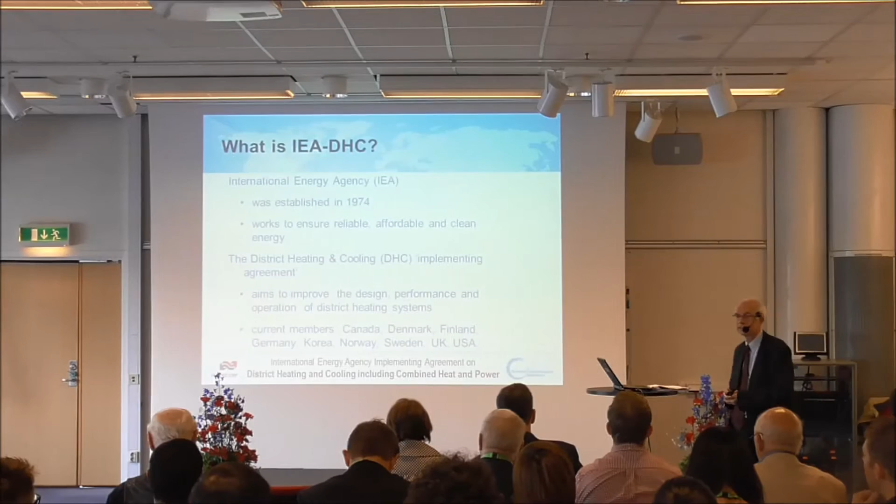First of all, then, what is IEA DHC? IEA stands for International Energy Agency. This was established in 1974 in response to the energy crisis at that time, and works to ensure reliable, affordable and clean energy. As a result, a number of these so-called implementing agreements were set up for energy efficient technologies, of which district heating and cooling is one. This aims to improve the design, performance and operation of district heating schemes, and we have 9 current member countries: Canada, Denmark, Finland, Germany, Korea, Norway, Sweden, UK and USA.

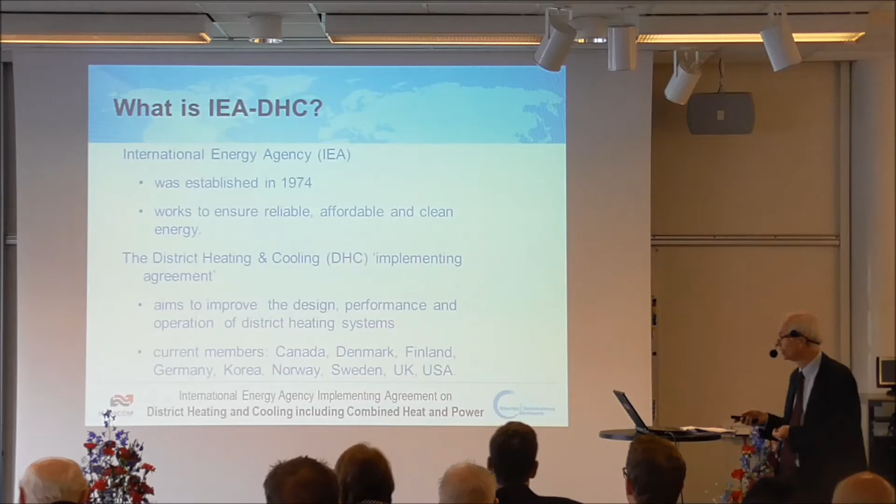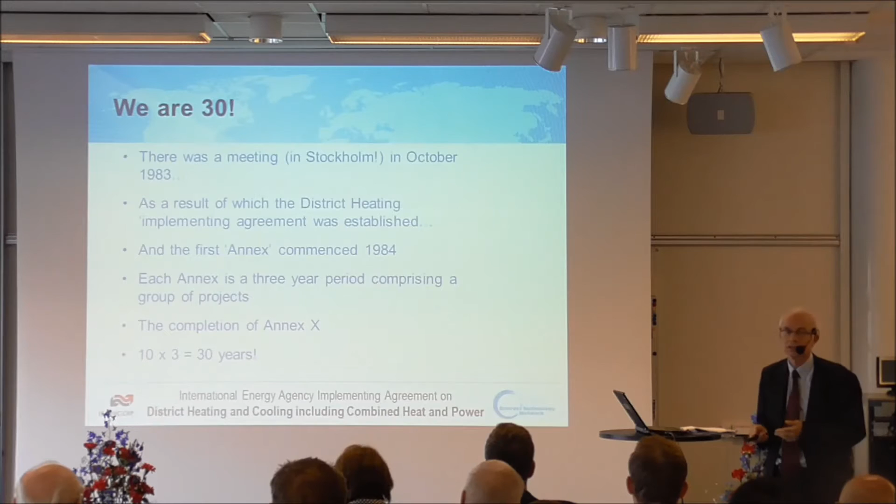This implementing agreement is 30 years old, and a little bit of digging into the history with the assistance of colleagues within our group revealed that there was a meeting in Stockholm in October 1983, as a result of which this implementing agreement was established, and the first so-called Annex appeared and commenced in 1984. Each of these annexes comprises a group of projects lasting 3 years, and we're at the completion of Annex 10. This is the end of Annex seminar for Annex 10. 10 times 3, 30 years.

So the significance of that, I think, is there's an awful lot of material on a lot of topics that's available. I look upon it as a kind of library or growing encyclopedia of district heating projects and research, which you are free to look at on our website.

So what exactly is it that we do? We carry out research projects on all aspects of district heating and cooling technology, focusing on reducing cost, improving performance, so pipe materials, installation techniques, system optimization, proactive maintenance, thermal storage, integration of renewables, to name but a few. There's something like an 80-20 split between technical and policy-focused projects, and the policy bit is primarily because we actually do have an influential voice by operating under the auspices of this International Energy Agency. That is connected into Energy Ministerial and gives us a good policy voice and influence.

I mentioned our website where you can find the research reports. There it is. So if you haven't seen that, please feel free to look. And if you have been there before, there's another reason to keep tabs on it, because shortly we will have these Annex 10 reports that we're going to hear about today. The full reports will be up there soon.

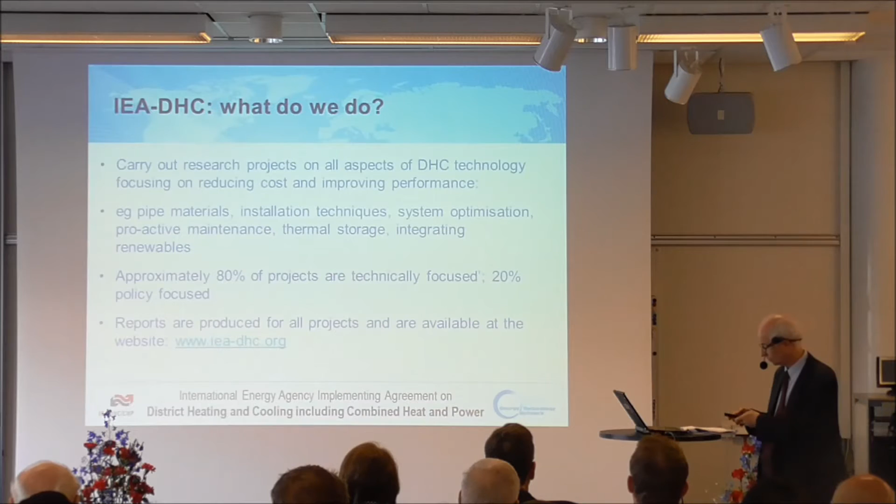I think it's exciting times for district heating. Sadly, I wasn't able to attend the symposium itself, but I heard what an amazing event it was. And I think this is kind of reflected right across the different influencing bodies that exist.

So that, for example, there is recognition at the IEA Secretariat, this thing called the CHP and DHC Collaborative taking place. You might think that that is kind of an automatic thing, that because we operate within or under the umbrella of the IEA, that the Secretariat would automatically represent us. But in actual fact, it is a relatively recent thing that they have strongly taken notice of our messages.

As well, at the European Commission, if we go back 10 years, there was really nearly nothing, to my knowledge anyway, on district heating, and now there is extensive project work going on. The other day, somebody sent me this information about an initiative at United Nations level, district energy in cities, unlocking the full potential of energy efficiency and renewable energy.

Then coming regionally, I did a little bit of Googling, and I hope it's accurate about the city we're in. Found that it aims to be a climate neutral city by 2050, and the notes that were against that were stressing, most notably, that 80% of buildings are already on district heating in the city.

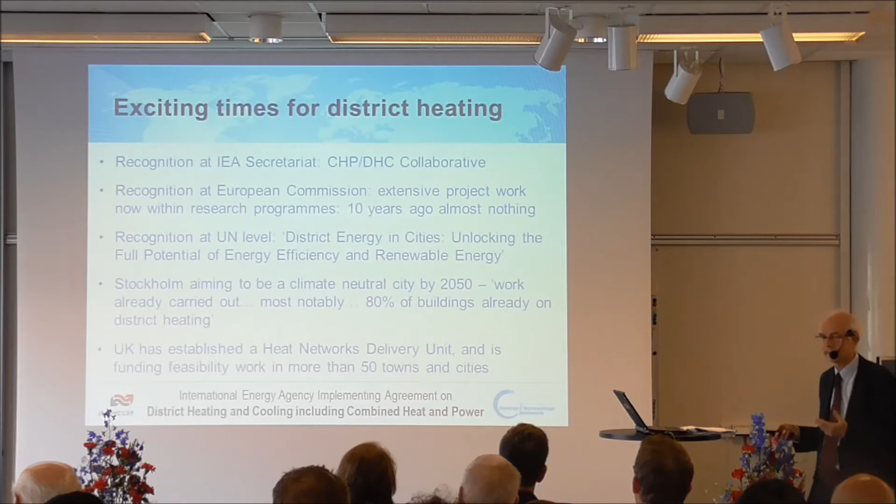But I think that there are also big challenges, which I would contend is where the international research comes in. All the markets are in slightly different places, and the technologies, I think, need to be shared and applied to different situations. I think awareness is improving. Of course, I'm talking most strongly about my own country, but I think that I sense some of the moods from other countries through the international collaborations.

So awareness is improving, but effort's still needed on that. There's also this whole thing about buildings progressively becoming more energy efficient, so there's a diminishing heat demand. I guess if you're actually in the district heating business, you could, in one sense, be disappointed that your sales might be going down. But I think actually that the future is strongly in the way of provision of an overall community solution. And I actually think that much of the district heating industry does recognise that. But I think it's an ongoing challenge.

Then there's the whole thing of reducing temperature supply. Some of these things will come out in the projects that you're going to hear about. Reducing the temperature supply lowers heat loss, increases efficiency, and opens up more potential for the use of renewables and locally available surplus energy.

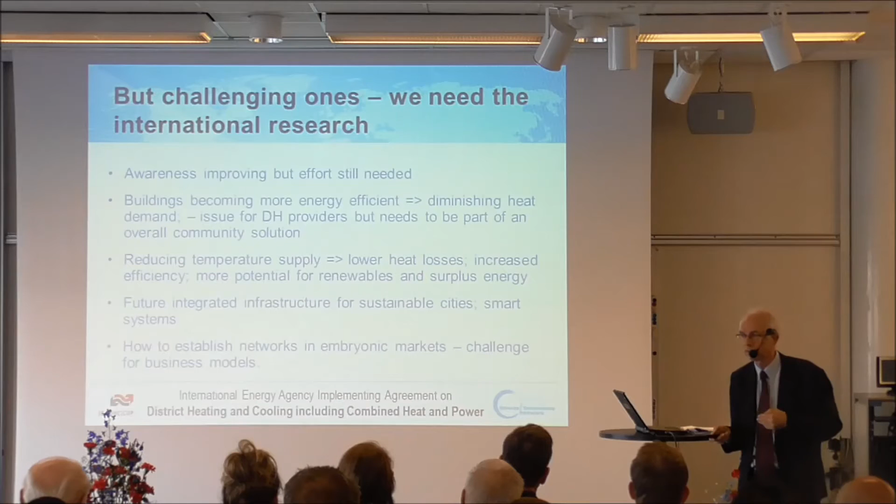And of course, how do we actually see increasing penetration, particularly in the countries where there isn't much at the moment, but where there is a high level of urbanisation? What should be the business models that can support the district heating model going forward, given that it's extremely capital intensive at the beginning?

So, yeah, I mean, the challenges is, I suppose, what we're here for. So a word about the projects that we have run under Annex 10. Because you're going to hear from the project managers themselves, I'm not going to attempt to tell you what their projects were about. I'm simply going to pick out the themes that are involved so you can see the arenas that we have been operating in within our group.

So low temperature district heating, which I mentioned, integrating of renewables and waste heat - I think there's a strong link between the two. And then, of course, coming to something very relevant to the district heating industry directly: improving maintenance strategies, becoming increasingly proactive rather than reactive. And also, very importantly, representing what are the actual savings that you can get from district heating - so the calculation tool, primary energy factors.

We will be, not surprisingly, going on to another annex, and I would like also to mention this initiative, which is a so-called task share. Without going too much into the mechanisms of how IEA projects work, this one is a longer acting project area which is still open to participate in. I saw Dietrich.

Dietrich, do you just indicate? There's Dietrich. Dietrich is the operating agent for this project, which I see building on some of the work we've done within the Annex 10 projects, most specifically the one on fourth generation systems, that top one. So with task sharing, if you are undertaking research in the area, for example, you can join in with like-minded people from other countries and form collaborative research in that way.

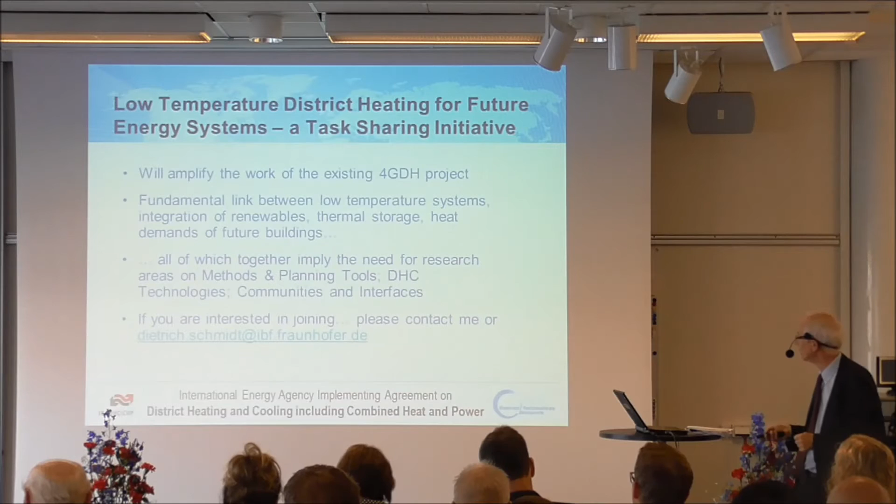Moving on to our Annex 11, operating in our usual way of competitively tendered projects, we identified these main topics as being ones that we felt needed to be addressed. So looking again at cost reduction, looking again at transformations from high to low temperature district heating, and also, very importantly, looking at the whole resource planning and business development area.

Out of those, we have these projects which we are in the process of contracting, and we hope that we will be running all 4 of these. So there is the transformation roadmap for high to low temperature district heating systems, reducing greenhouse gas emissions and energy consumption by optimizing urban form. I mentioned smart elements being very important - smart use is the missing link - and the governance models and strategic decision-making processes.

So those, please just keep your eye on the website again for news of how those are progressing. As I say, we hope to be moving forward with all of those throughout the next 3-year period.

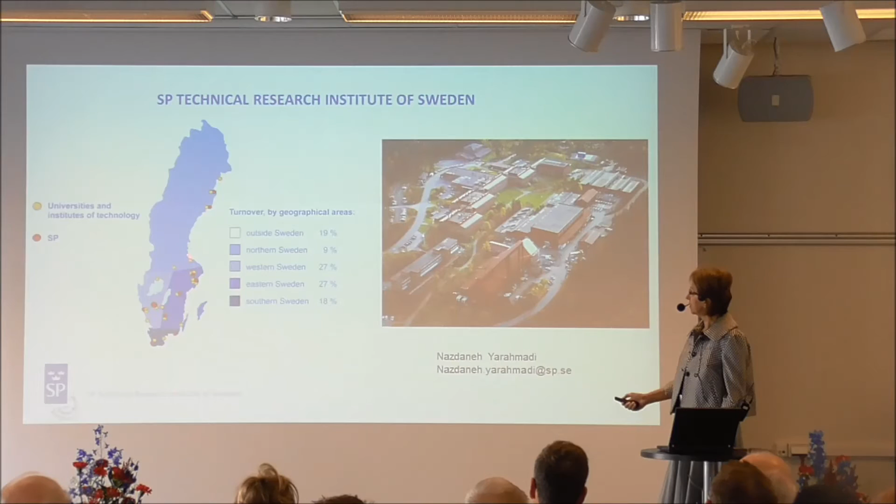Good morning, ladies and gentlemen. My name is Nazdaneh Yarahmadi, and I'm from SP Technical Research Institute of Sweden. SP is located here in the west part of Sweden, about 60 kilometers from Gothenburg. SP also has facilities in different parts of Sweden, and last year even in Copenhagen, Denmark. This is the headquarters of SP at Borås.

The project that I will present some results from is called Improved Maintenance Strategy for District Heating Pipeline. This project is financed partially by IEA and partially by SP, and it's performed at the Structural and Solid Mechanics Department at SP. The partners in this project were KDHC from South Korea, Statkraft from Norway, and IMA from Germany.

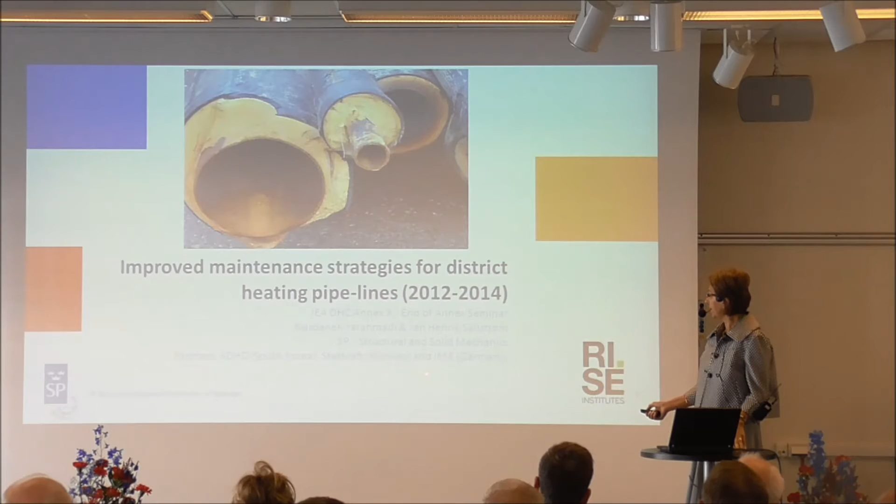This slide shows the activities during the project. We started with a kick-off meeting, and after that we had a project group that chose the method for obtaining technical properties of pipe. We finally got pipes from Logstor, new pipes, and set up an experiment. After a while we had a first expert group meeting, and we analyzed the results from accelerated aging of new pipes, and in parallel sketched a model to use the results. After a while, we had expert group meeting number 2 in Gothenburg, where we presented and discussed the results.

After that, we got pipe which was in operation in Korea and Norway from 2 different networks, and we investigated them, trying to correlate results from accelerated aging with those pipes from operation. We documented everything along the way, had very good contact with IEA, and disseminated the results, and now I'm here to report for you.

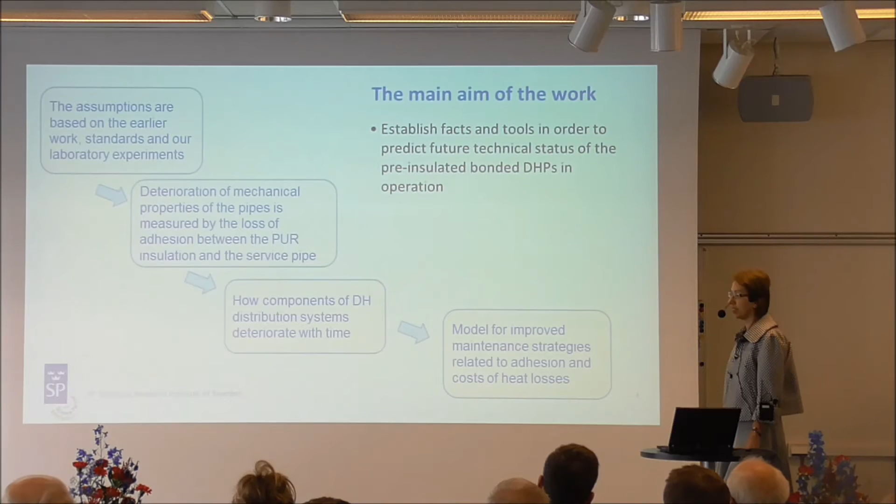I would like to say some more about the background and assumptions. According to literature and earlier work, there is a hypothesis that the degradation of polyurethane is caused by thermo-oxidative reaction due to oxygen diffusion through the polyethylene casing.

We had a previous project at SP where we also worked with a method as an alternative for measuring the loss of adhesion between insulation and service pipe. There is also a standard, EN 253, where measuring of shear strength is performed using tangential and axial methods, with certain criteria - for example, for the axial method it's 0.12 megapascal for shear strength. This was the assumption we tried to use in our project.

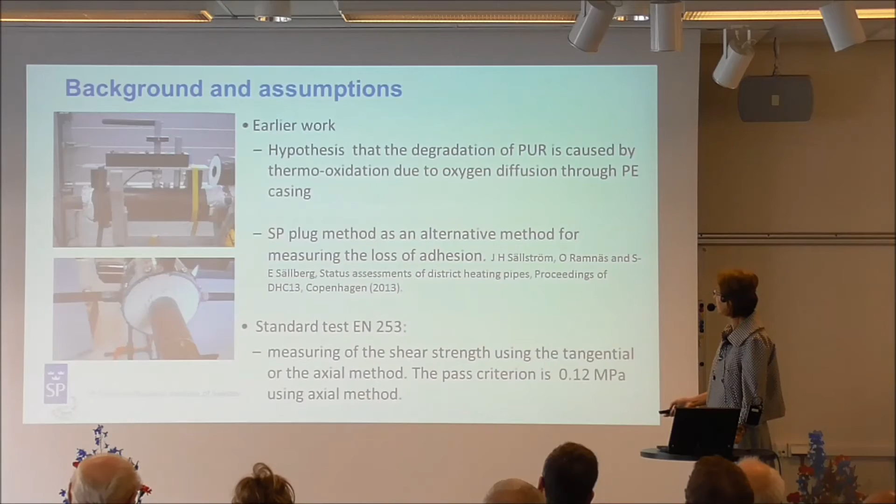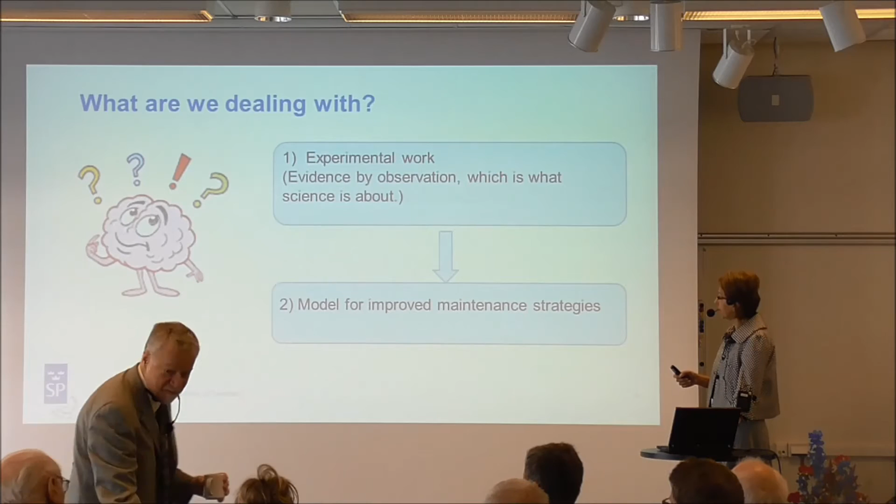What are we dealing with? We wanted to do some experimental work. We simulated natural aging using accelerated thermal and thermo-oxidative aging, and we have pipes from operation which will be evaluated using the same method as the accelerated new pipes. With those, we try to find activation energy using the Arrhenius relationship, which lets us predict and extrapolate into the future, using our model to see how we can predict the technical status of the pipe.

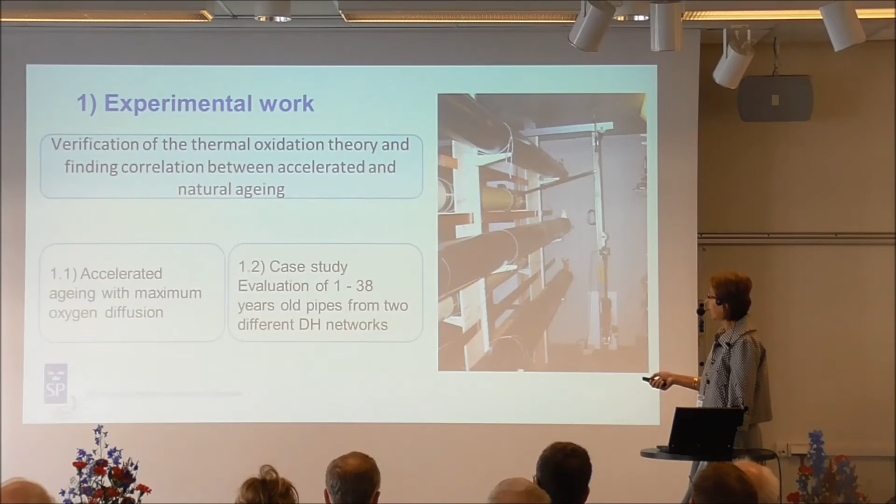In this part, we will try to verify the thermal oxidation theory and find a correlation between accelerated and naturally aged pipe. We did our accelerated aging by using maximum oxygen diffusion. I will talk later about this. And we got pipe from our partner, which was aged 1 up to 38 years old, from these two district heating networks, and evaluated them to find this correlation.

This is again our heat chamber, and the pipe size was DN50/160, and we have two different casing thicknesses. The black one is the normal 3 millimeter casing, and the light one is 0.15 millimeter thin polyethylene casing. These pipes are aged by electricity, and they are exposed to 130, 140, and 150 degrees inside, and the chamber ambient temperature was 70 degrees.

At the same time, we have the pipe that you cannot see in this picture. This is this part of the chamber, and they are not connected to heating inside. They are just placed and exposed inside and outside to 70 degrees. And also we have pipe in controlled climate, 23 plus minus 2 degrees, in another chamber as reference pipes.

We tried to see when we decrease the thickness and give the oxygen a chance by increasing the diffusion rate 20 times here, and 13 times when we increase the ambient temperature from the ground temperature, that normally is about 10 degrees, up to 70 degrees. We age pipes and take them out at different times in order to evaluate their shear strength, up to 350 days.

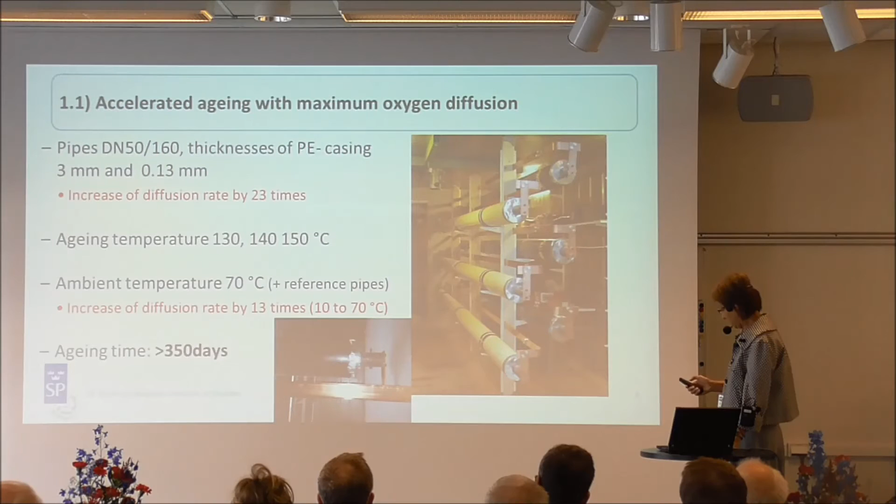No? So. No. Pause. Back here. No. Okay. So, thank you.

This point is the shear strength result from reference pipes, which is unaged, and the result from aging at 70 degrees. You can see that it decreases at the first part and then flattens out, and you get a plateau in the curve. This is for 70 degrees, 130, 140, and 150 inside. And you can see that the shear strength decreases fast at the beginning and then reaches a constant value. It depends on temperature and not the time.

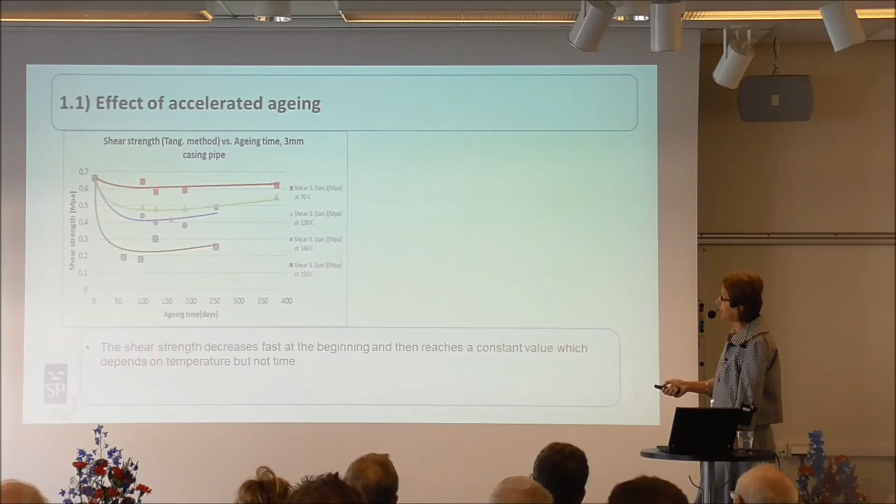Okay, here is the result when we compare the 3 millimeter and 0.13 millimeter casing, and we measure the shear strength versus aging time. In the red points, you can see the result for 130 degrees evaluated by the tangential shear method, and 130 degrees for 0.13 millimeter, also evaluated by the tangential shear method. And the same behavior you can see regardless of diffusion of oxygen, and no significant difference between the 3 millimeter and 0.13 millimeter for mechanical strength.

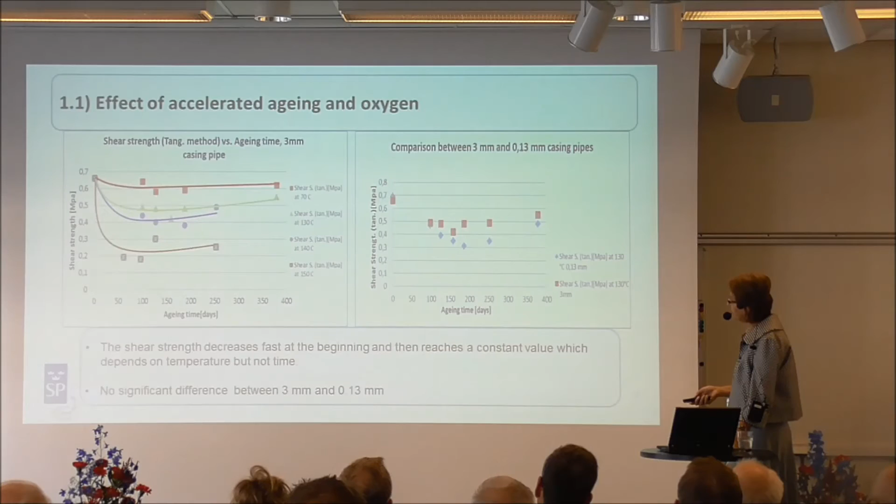We saw another indication of what happened in the pipe. Here you can see the pipe with thin casing when it is aged at 140 and 150, that they just lost their adhesion, and we got a gap and we couldn't evaluate them. Therefore we replaced them with pipe that we wrapped 1 millimeter steel wire around, with 50 millimeter spacing, in order to give them the same stiffness as a polyethylene casing of 3 millimeter. And then we aged them again and evaluated them, and we got the same behavior as the thick casing.

We also controlled the temperature, because we had the electricity heating, how the temperature profile was along the pipe, and tried to use just samples that actually got the right temperature.

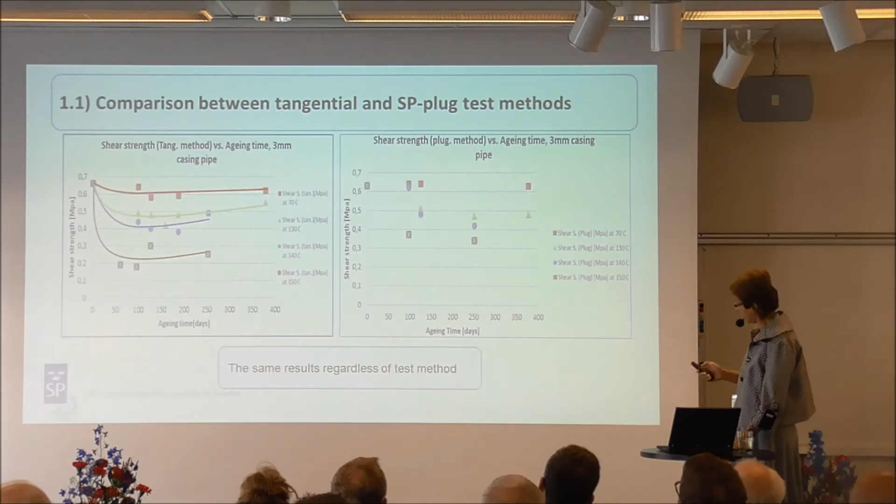Here you can see a comparison between the tangential shear test according to the standard and the SP plug test method that we developed, because the SP plug test method is very useful and very easy to use in the field. And we will see if we can get the same behavior for the pipes. And we got the same. You can see here, for 3 millimeter casing, normal casing, and different methods. But we had some correlation that we calculated at the end of this project.

Yes, this is the plug test method that we did, and this is the correlation that we got. You can see the samples taken from unaged and aged pipes, and we cannot see even discoloration so significant that it's degraded.

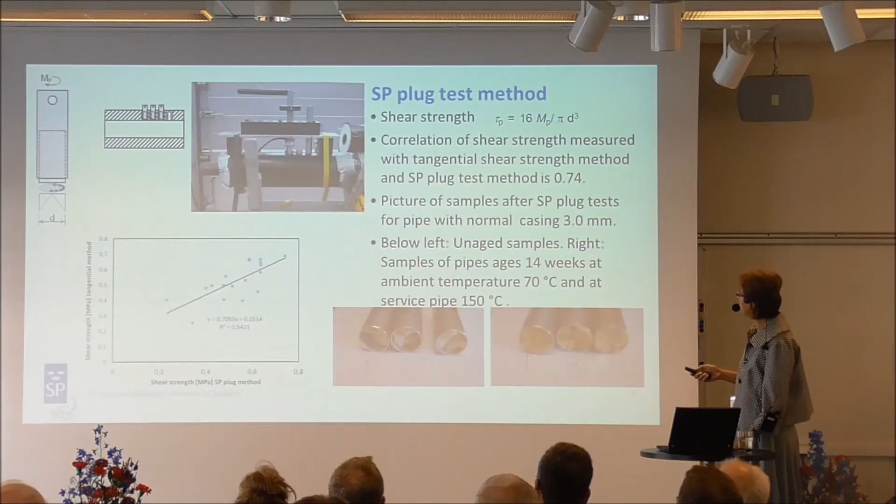Okay, this is very much a summary of this part. As I said, the tangential and SP plug methods indicate a similar tendency, and the thin casing shows larger gaps between insulation and service pipe at 140 and 150 degrees. And the shear strength decreases fast in the beginning, and it obtains a constant value for all temperatures. And this indicates a physical type of process. I will talk about it a little more.

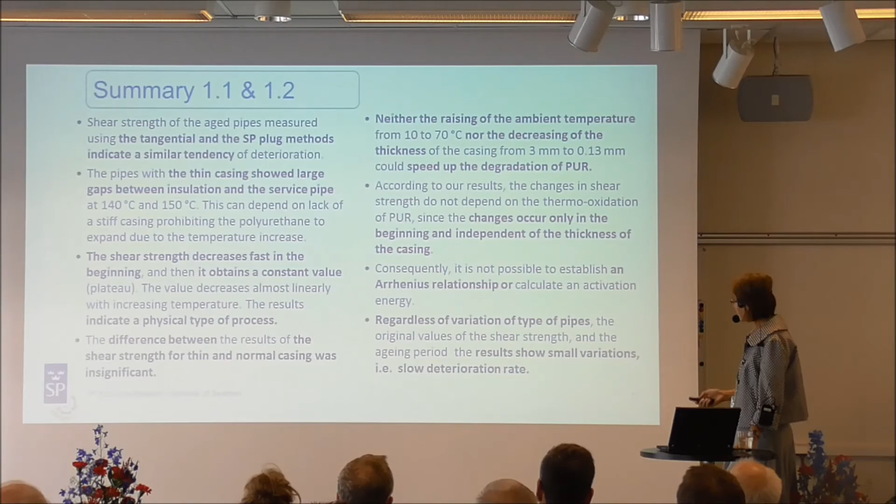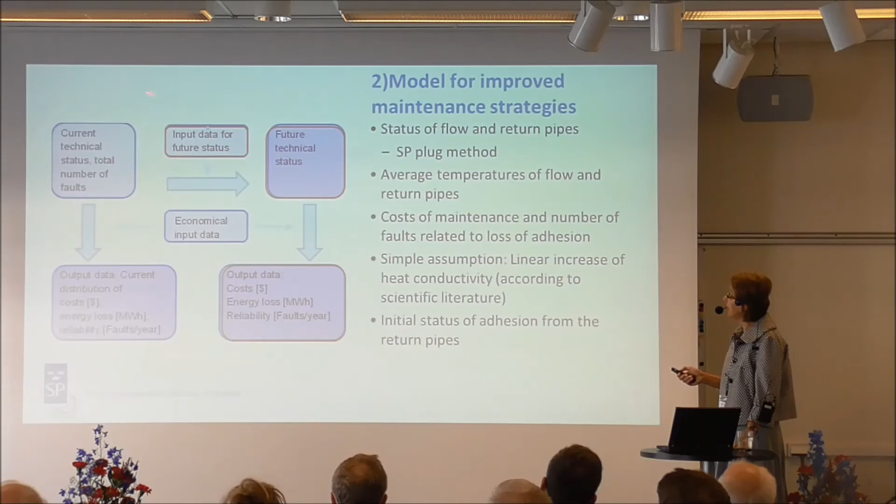Okay, we had the intent to sketch a model and give a model for improved maintenance. We are sketching a model, and we saw that we have all these boxes, but the input data from our experiments and evaluation of the pipes that we got from operation cannot give us the input for an Arrhenius relationship and extrapolation to get future technical status.

But if I can show you here, this is the typical Arrhenius relationship when you have changes in properties and you have a critical value that, for example, according to standard should be 0.12 for axial. And when the material changes and the properties change, you get an induction time, and then the change increases. This is the rate-controlling step, and this is the saturated phase where you have already lost the technical properties of your product.

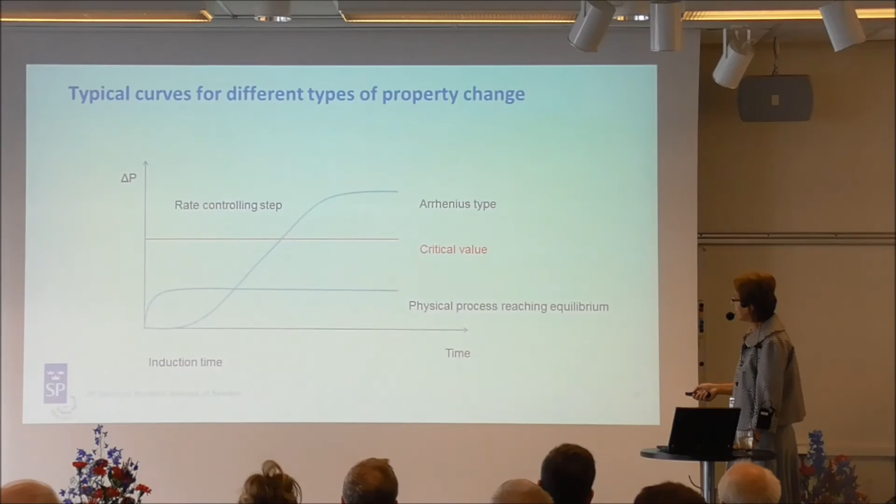But in our case, the behavior was like this. We just get a drop at the beginning, and then we get a plateau. This is a typical physical process when it reaches equilibrium. But we tried to see how we can use our model if Arrhenius was correct.

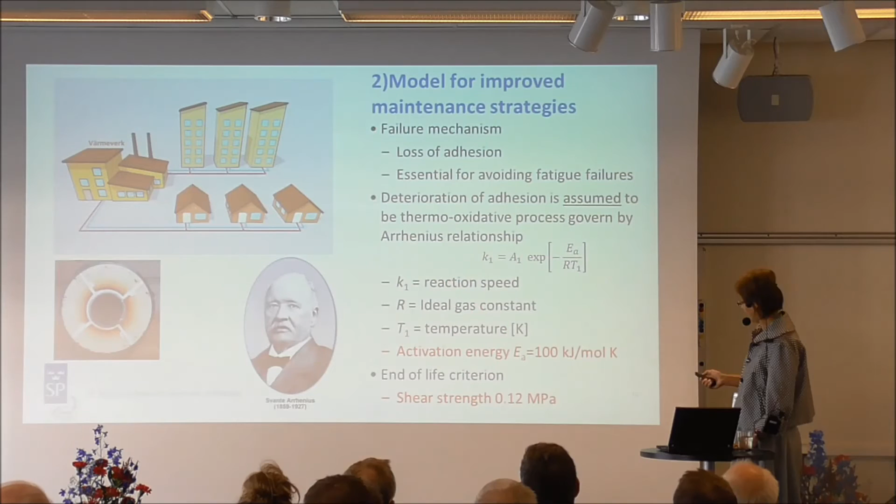We didn't have any activation energy. This is from literature, and this is also from the standard. If we couldn't calculate activation energy, we could find it here, use the criterion and the Arrhenius relationship, and calculate it. And as many people do at this time, according to standard, they calculate, they get some numbers, and they take this as the base for their decision. But I don't know how we can trust it. The future can show it.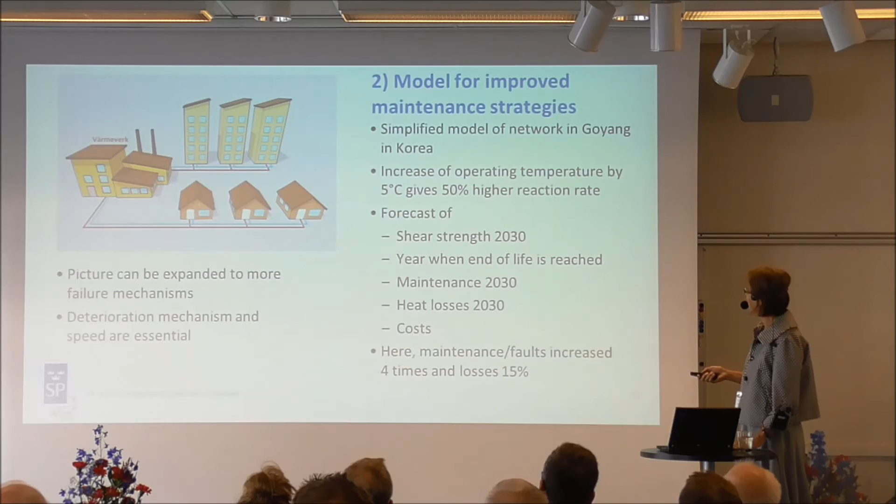The conclusion of our work is that we can use the SP plug method in the field for measuring the shear strength, and it is as reliable as the tangential test method. And the character of the change in properties, mechanical properties at least, is physical, and we cannot use the Arrhenius relationship. And we need to do more work in order to elaborate a model that reflects the observed behavior.

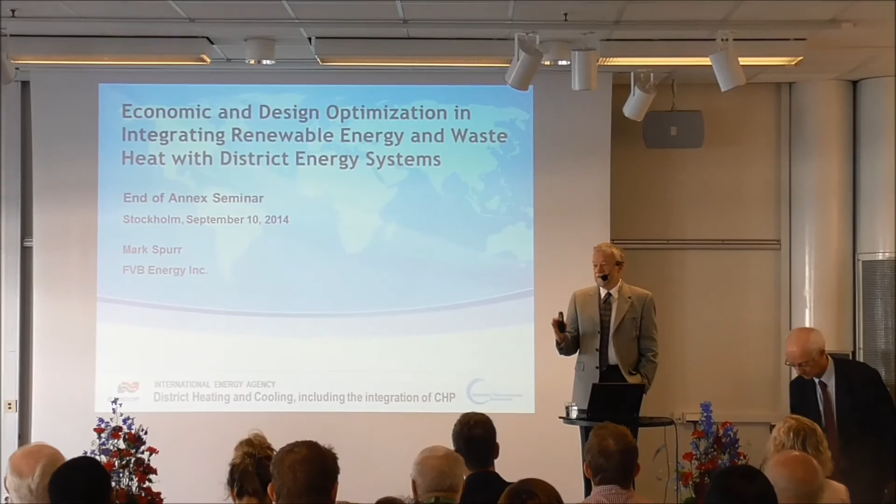Our project is quite a bit different in nature, whereas the project you just heard about had a very precise scientific scope. Ours is much broader. I'd like to outline our presentation a bit and then get into it. I want to talk just briefly about what the scope of it was, the purpose of the report, what role we saw this document playing, and then

talk a bit about the really most fundamental considerations when we consider this broad question of how do we best integrate renewable energy and waste heat into district energy systems, what are some key things that we need to look at? Those being, I think, obviously enough temperature and availability of the resource. And then we'll address very briefly questions relating to how to optimize these resources.

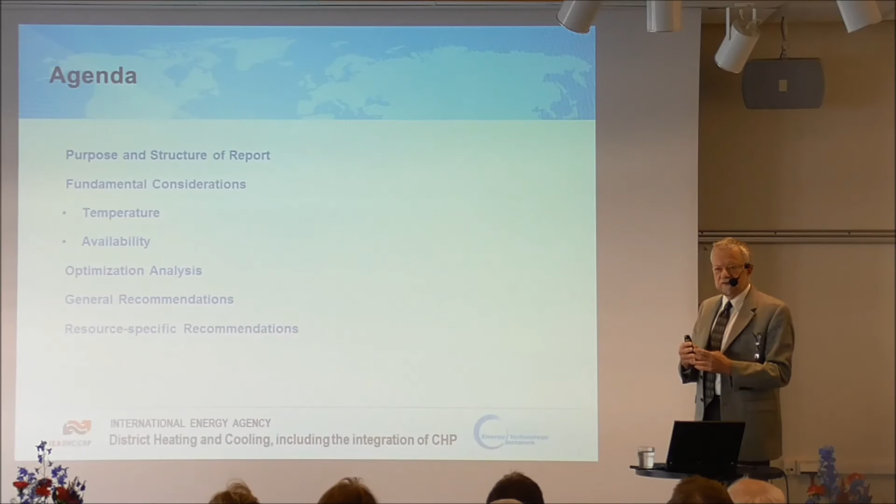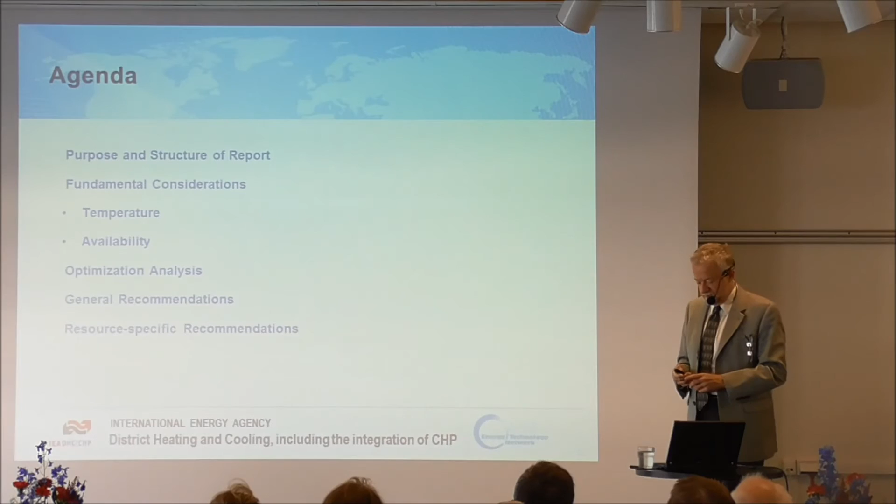So we thought that it would be a worthwhile enterprise in this annex to have a look at how best to integrate those resources. We're looking at not only technical issues, but we're trying to evaluate how to compare the costs of different types of resources. And obviously, when we make comparisons of costs, it's very tricky because we're making comparisons of costs with today's knowledge. We don't know what's going to happen in the future relative to prices, which makes decision-making difficult.

We also talk a bit about business issues and how some of the rate and contractual underpinnings of district energy systems can affect what choices you make and vice versa. We developed a number of case studies. I think we had a total of 20 case studies. The idea was to not only illustrate what's possible with these resources, but also to try to highlight some key challenges for integrating them and to suggest some solutions.

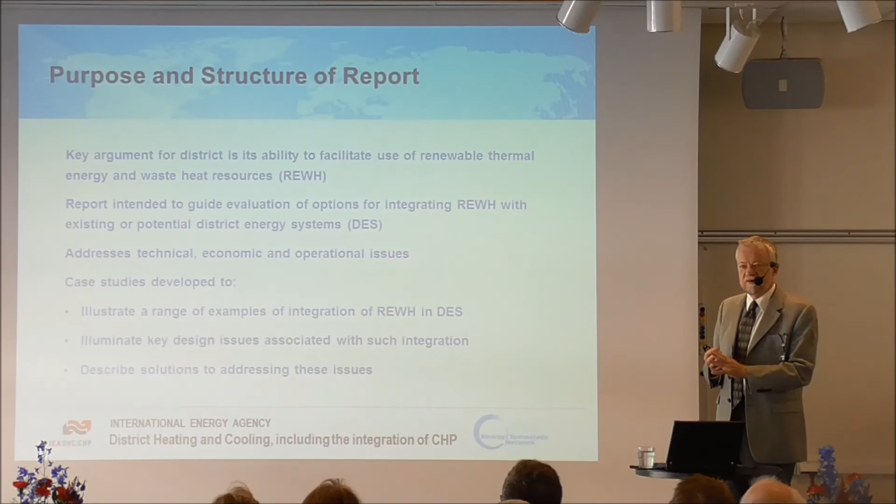One of the things that we were disappointed about in our work was we hoped to develop some very hard, comprehensive case study information about the costs and the technical performance and other aspects of these projects. We found it was very difficult to extract really complete data from the sponsors.

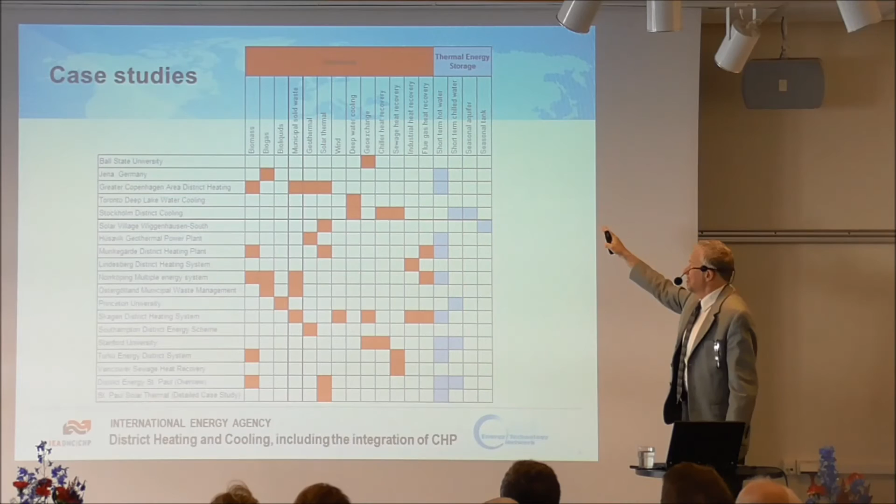This is an outline. I don't expect you to process this information, but I wanted to throw up the individual case studies and their relevance to various resources shown in red, and also with the importance of thermal energy storage, both heating and cooling. Wanted to show their relevance for those, just to give an idea of the types of resources and technologies that were illustrated in the case studies.

We thought it would be useful when we considered renewable and waste heat sources to categorize them. And so we came up with three terms. One being high-grade sources, where the temperature of the resources is always higher than the temperature you need for your district system, and thus can be dispatched and used whenever you want. Then we categorized what we call low-grade resources to be those that are sometimes but not always sufficient for the supply temperature, but are always at least at the temperature of the return of the system.

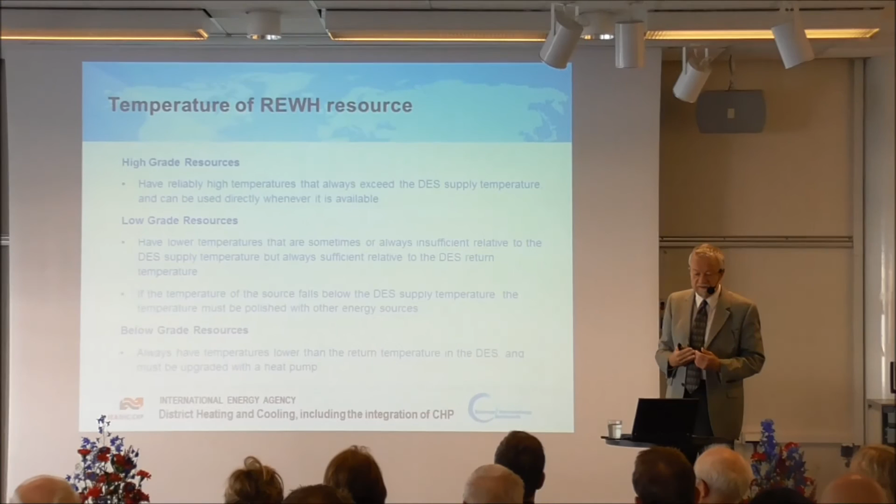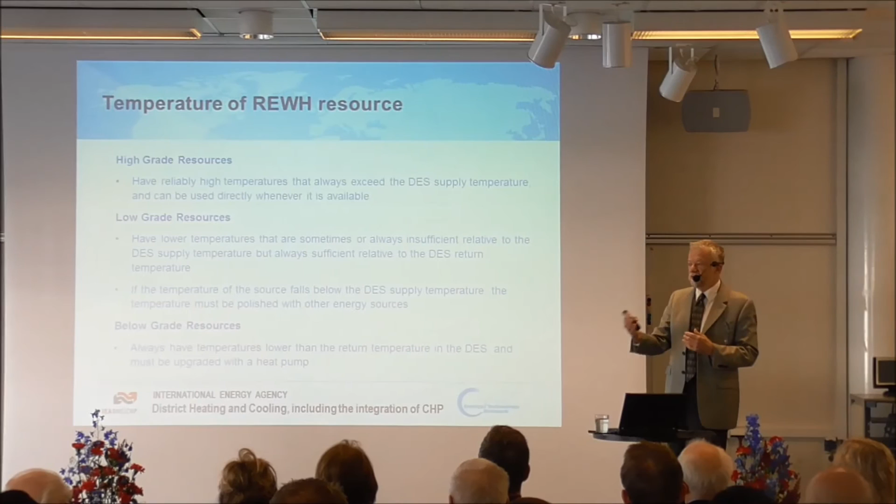So in those times when the resource is lower than the supply, that needs to be polished in some way. You need to bring in some other energy source in order to bring it up to your required temperature. And then we weren't aware that anybody had used this term before, but we came up with the term below-grade resources, in which the resource itself is always lower than the temperature you need, but those are resources that you need to upgrade with a heat pump. You can think of, for example, ground source as being an example of that.

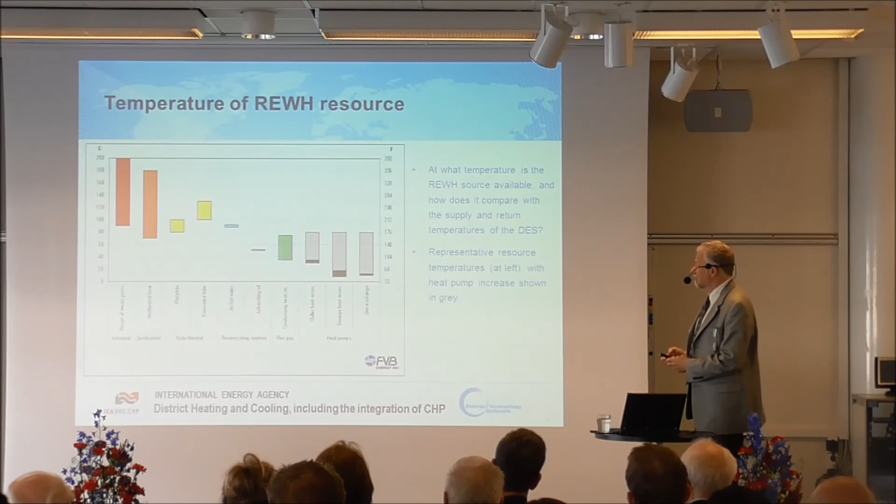If we switch now from the temperature of the resource to the temperature of the district heating system, we wanted to illustrate a range of possible practices. I realize that this looks possibly criminal to your European eyes, but that's the reality in too many systems in the U.S., where we have very high pressure, high temperature steam being distributed. So part of our goal, quite frankly, is not only to assist in integrating renewable resources and waste heat here, but we're really trying to move North American systems down in temperature.

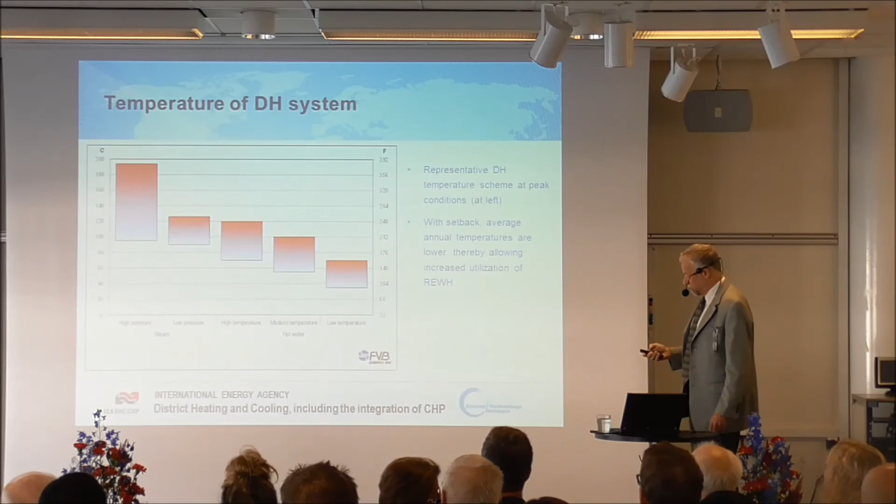You can see supply and return temperatures for high and lower temperature steam, and then 3 different temperature regimes for hot water systems. What we're going to do now is just take a really quick look at how these 5 temperature schemes comport with the temperatures of the resources. But before we do that, it's important to also realize that we do have a temperature reset approach in most district systems. So this shows the supply and return temperatures for our hot water systems now, high, medium, and low temperature.

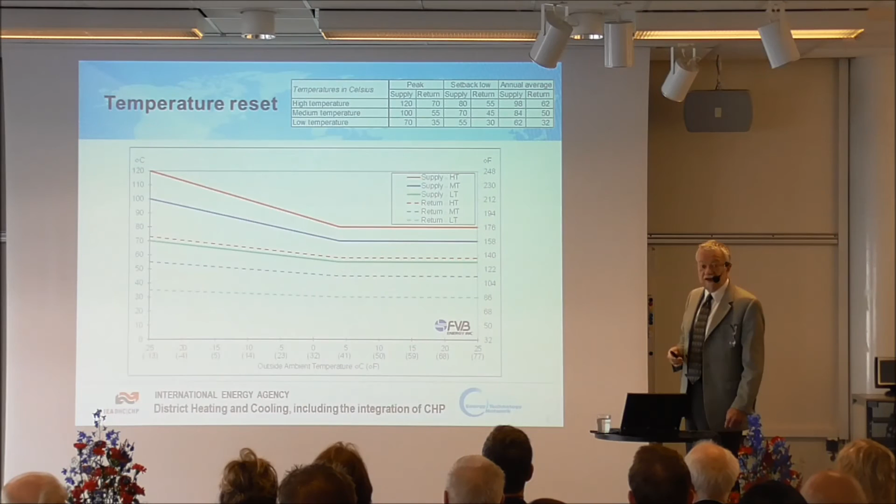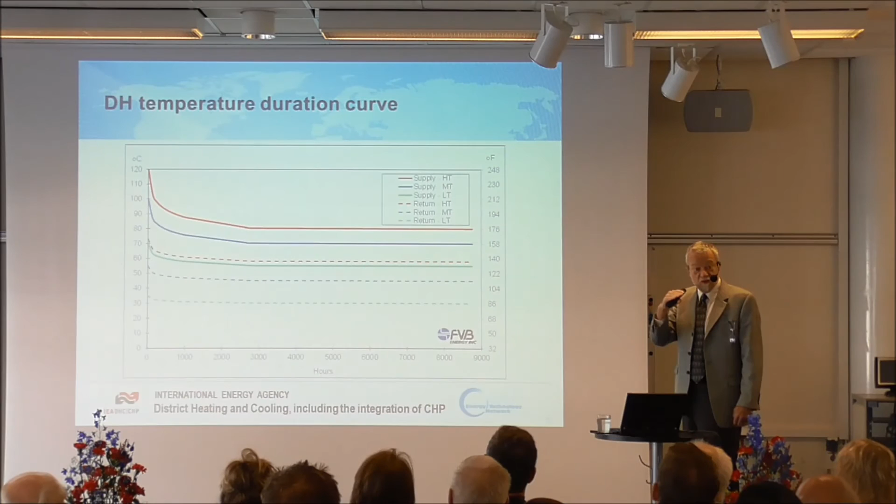And it's important to illustrate this because when you look at the actual annual duration of those temperatures, although we might have a design temperature of 100 C, for example, really most of the year the temperature is quite a bit lower, and so you need to be designing for what the preponderance of those hours would be.

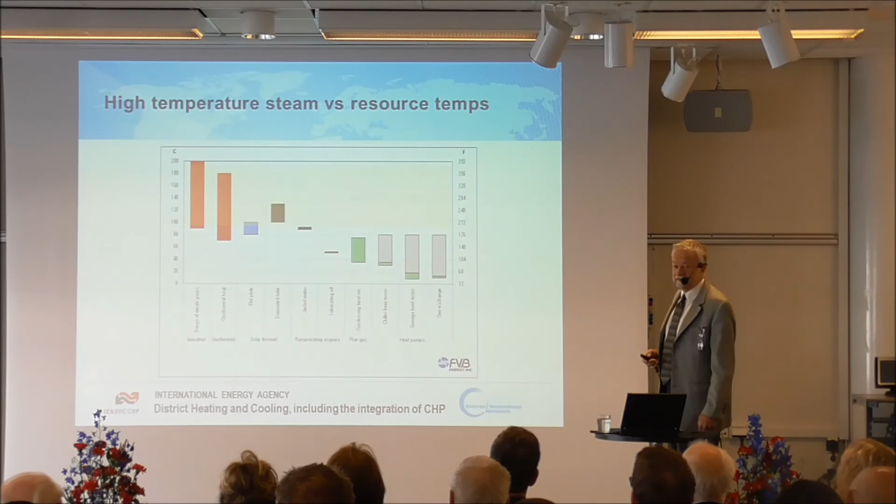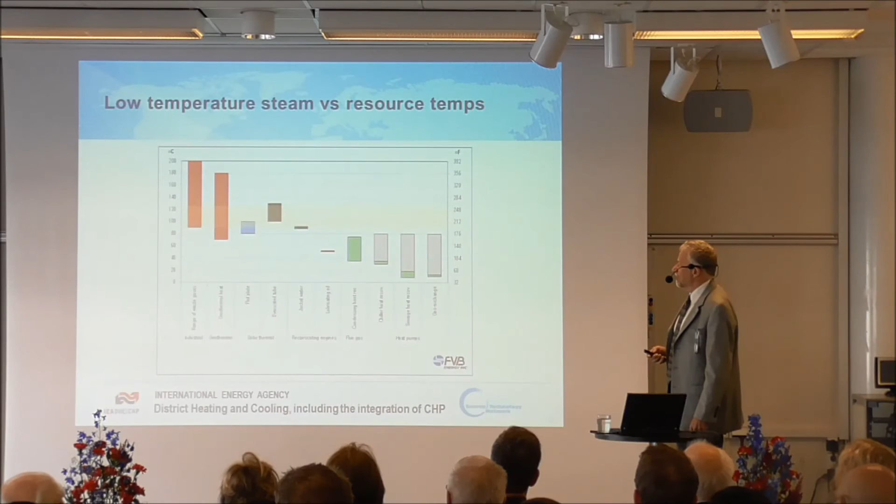So when we compare the resource temperatures to the temperature range shown in the very light yellow here for a high temperature steam system, we're largely missing a lot of opportunities. If we go down to a low pressure steam, like a 1 bar, 15 psi steam system, we do pick up some opportunities, but then we go to what we term a high temperature hot water system. And these temperatures, by the way, are not the peak design condition, they're the average, because as we discussed, we want to be looking for those typical temperature conditions.

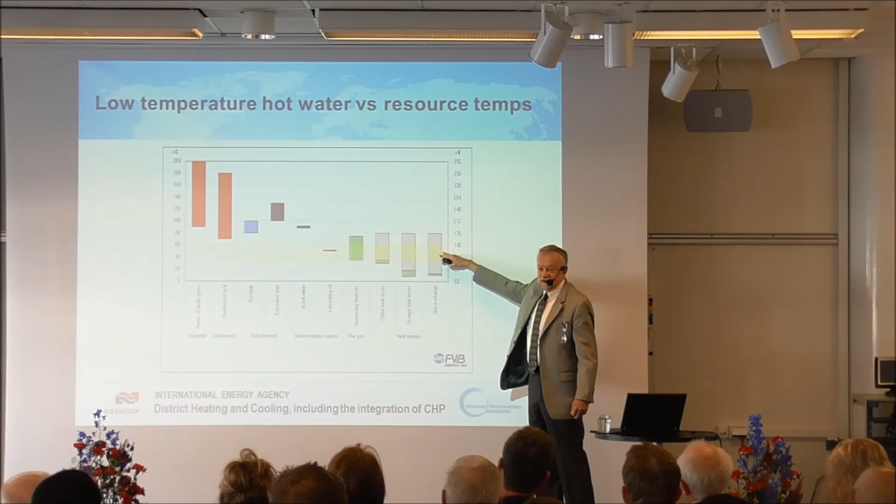When we move to a medium temperature and low temperature scheme, we see we're able to bring in a lot of resources that we weren't able to bring in otherwise. And when you're here, the energy it takes for a heat pump to produce this temperature is going to be less than if you're having to get all the way up to here.

One of the other key aspects beyond temperature is availability. I guess that's an obvious thing. Resources, you need to be considering the resource availability pattern on an hourly basis as well as a daily basis. And in some cases, such as solar, the distribution of the resource is really often counter to when you most need it. So it becomes very important to use thermal storage in situations like that.

We took a look at not only some of the technical questions relating to industrial waste heat, but also some of the business issues, and we'll get into that more in a bit. But a truly solid understanding of the availability pattern is pretty essential, because there's no other way to really properly size, well, how much of that waste heat source or renewable source do you want to size for?

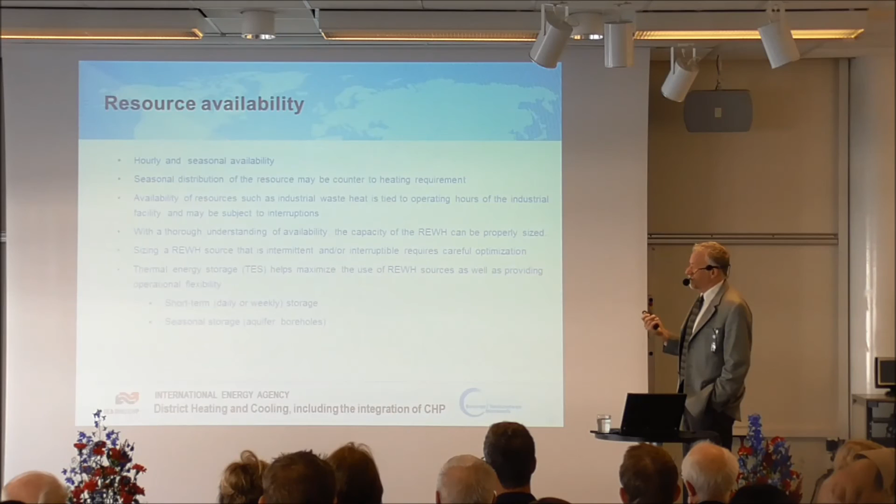And as noted, thermal energy storage really has to play an essential role in a number of these resources, including solar energy in particular, but many others as well. And in some cases, that storage is going to be most effective if it's actually sized for a seasonal store.

The temperature, the trend is clear. I mean, here in Europe, we're pushing down in temperature. In North America, we are from a very high level coming down. It's important to understand that, you know, lower is not always better, because there's a balance to be achieved. If you go too low, you can make things rather expensive in the buildings.

So one of the things that we have the luxury of doing when we're designing a new system, and there are entirely new buildings being built, is to truly optimize that investment in building side systems versus the knock-on effects in the distribution system and the sources. And has been discussed at some length in the past couple of days.

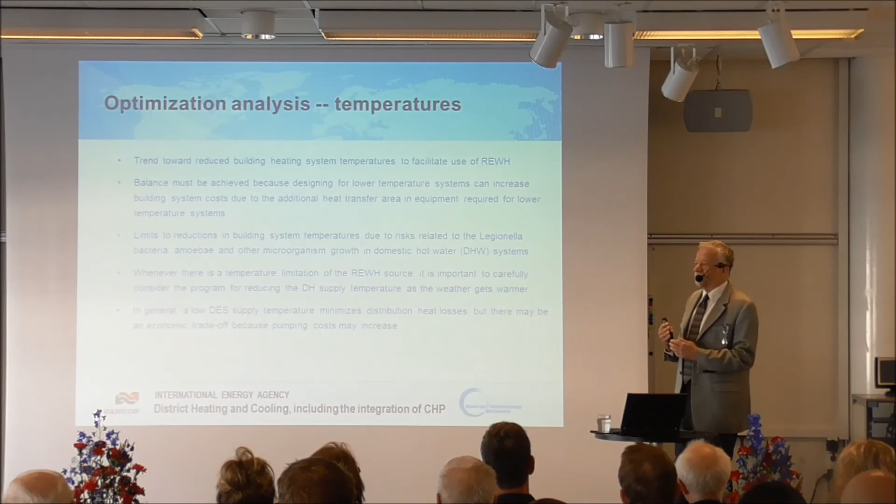There's some great work being done on low temperature systems and the challenges that are bumped up against relative to Legionella. The solutions have been put forward in that regard. And we don't, in this study, try to rehash a lot of that. And also in terms of the supply temperature, we're trying, whenever we can, to use a kind of a polishing resource and really aim the general production at a very low temperature.

This chart attempts to put into one matrix both the temperature and the availability characteristics of the resources. So you have on the top dispatchable resources, some of them are things you can burn that make it easy to dispatch at high temperature whenever required. Others may be lower grade depending on the particular resource, geo-exchange being a good example of a below grade scheme.

There are other resources that are really correlated with the district heat load. So, for example, if you're recovering condensation, latent heat out of the flue gas, if you're operating your boiler, you by definition have load, and likely on the other side we have a chiller heat recovery where you have a correlation in this case with the cooling load. So it becomes very important in the analysis to look at that overlap.

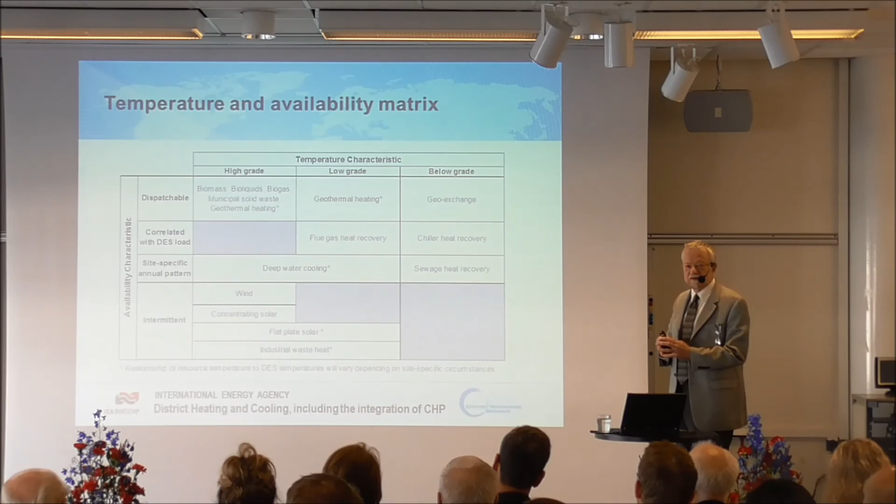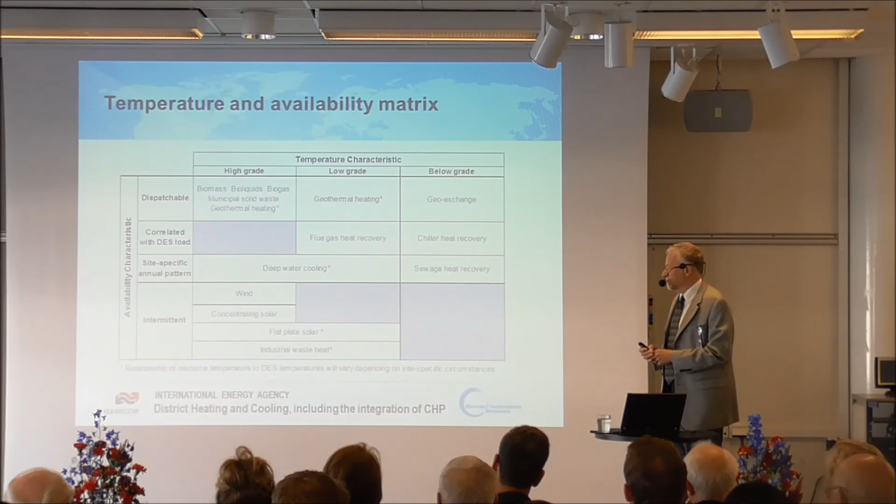Didn't really talk about deep water cooling or sewage heat recovery, but those are very site-specific things. The temperature of the water for deep water cooling is going to be dependent on season and depth. So a thorough understanding of those specific patterns is essential. Sewage heat recovery, also very site-specific in the sense that it's dependent on flows that have their own pattern. And then the intermittent resources, wind and the various solar resources.

In terms of recommendations regarding, well, I want to integrate more renewables and waste heat into my district energy system. What should I do? One of the first things that we'd recommend is really think through why you're doing this, because there are often a mix of motivations,

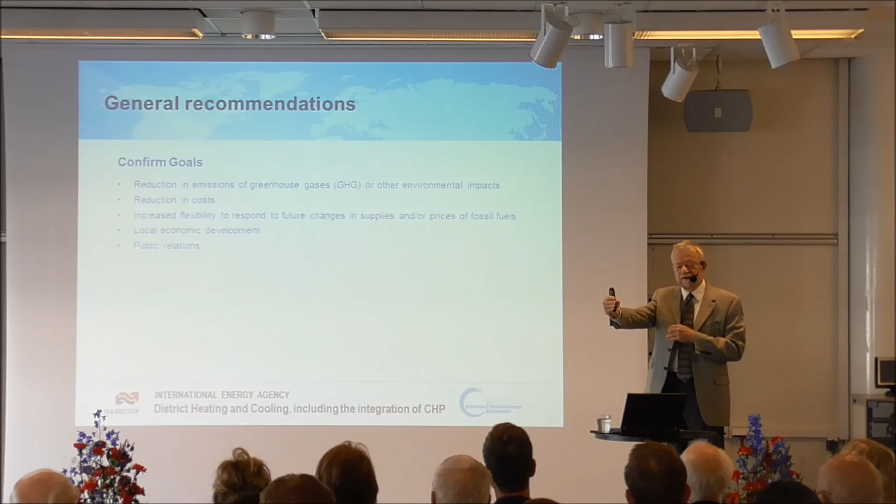usually driven by environmental considerations, but sometimes driven by PR, by public relations, and some of the projects that we investigated, they were quite clear that, well, we did this because we thought that it would be a nice visibility thing. And you need to be honest with yourself about why you're doing what you're doing. In other cases, they're being done because they're making a bet, and it is a bet, that in the long term, these costs will be lower. And that is a dicey thing because nobody can predict the future, last I checked.

In terms of modeling, it's pretty critical to do an 8,760-hour look at not only your loads, but also your resource. There's no other way to truly size and design a system. But it's important not only to look at what the load is, but what the relevant temperatures are, and that, as we've just discussed, can be different.

In a number of projects we've worked on, we're looking at chiller heat recovery, integrating cooling, and it becomes trickier but more important to understand when those loads are simultaneous. When the heating and cooling load is simultaneous, or near simultaneous, in the sense that with daily storage you can store some heat from the day for use at night, for example.

Assessment of each resource - I'm not going to belabor this list, I think in most cases they're relatively obvious exercises. The one I'd probably talk a little bit about is the long-term potential for resource competition.

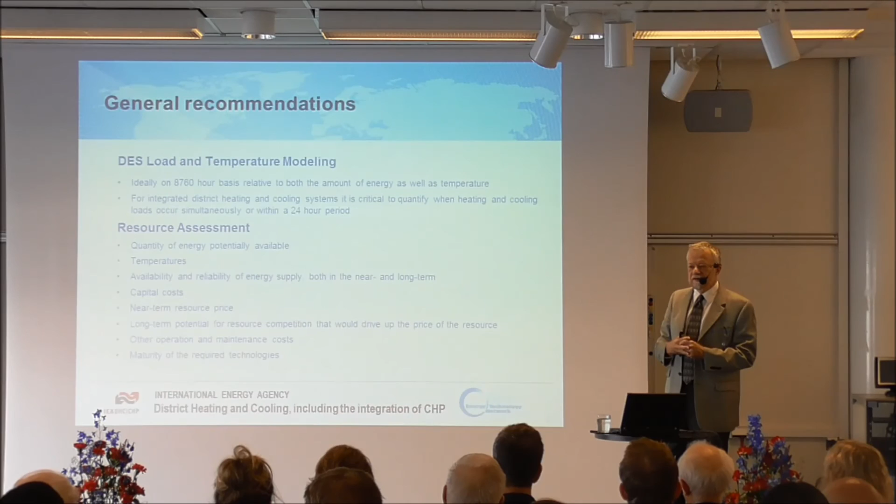The other thing I'll mention in this list of the obvious is the maturity of the technology. We've seen some people move forward with technologies that really were not quite ready for prime time, as we'd say in the States. So I think it's very important to think hard about it. If you're doing it for the purpose of reliable, serious energy supply, you need to look hard at the maturity of the technology.

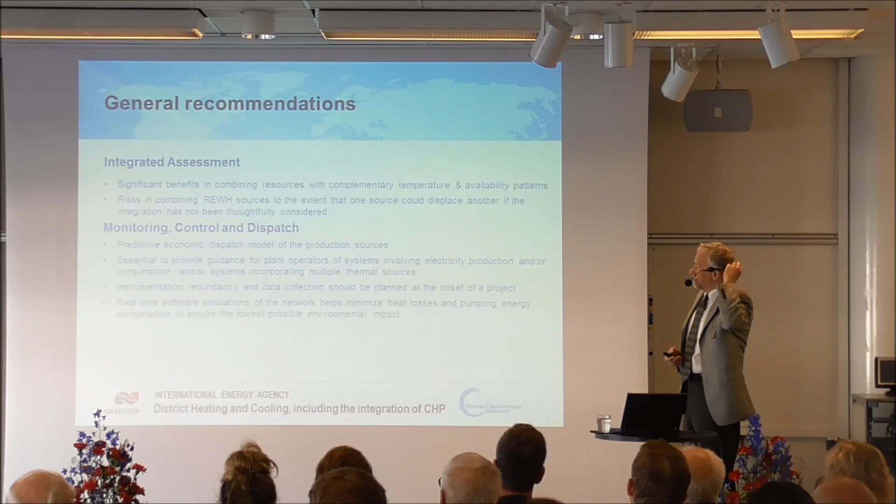One of the other things that gets a little tricky is if you are combining - in many of the case studies we examined - multiple renewable or waste heat resources. There are some really great strengths to that in terms of flexibility and diversity of your energy portfolio. But it's also important to understand that to the extent you are reducing your loads because you're deloading from using a waste heat source, you may need to ramp back some of your other resources, which may get you into trouble. There are any number of cases where combined heat and power plants have run into problems because the loads they previously supplied are now being supplied by other resources. So you just need to go into it with your eyes open.

We have seen, particularly in markets where there's a very dynamic power market - a real-time hourly power market - that predictive models which look at what's going to be the power load, what's going to be the power price, what's my thermal load, what's the cost of my thermal resources, is a pretty important, really essential thing for a multi-resource district energy system, particularly one that is playing in an electric market, which many of us are.

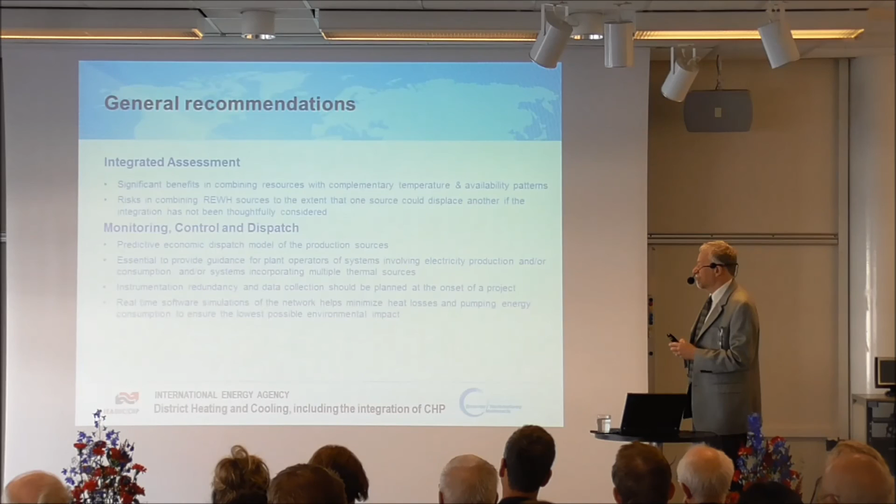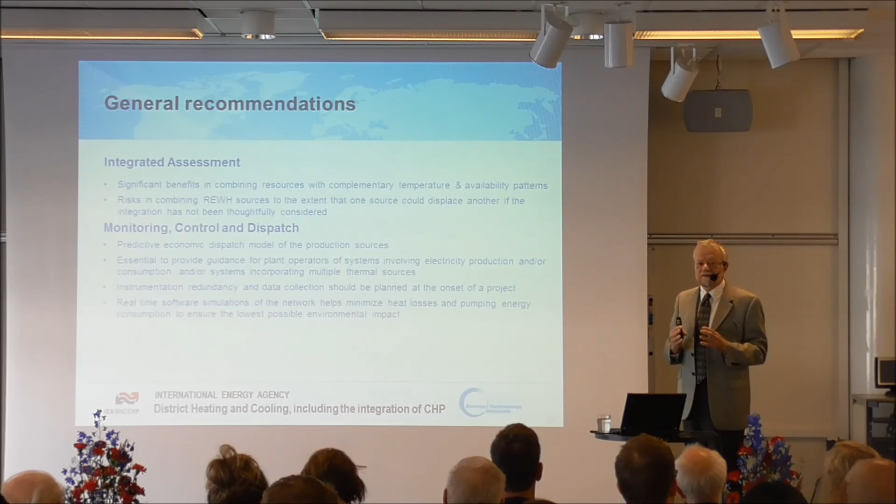The other point I want to make, when I talk to people who have some pretty sophisticated software that they use, they always make the point that ultimately this model is for human beings who make the decisions. So it's not as if you can just say, oh, the model's taking care of it, I'm going to go have a cigarette. In some cases, the presence of a human being makes all the difference in the world in really making the right decision - usually when things are going wrong, or in an unpredicted way.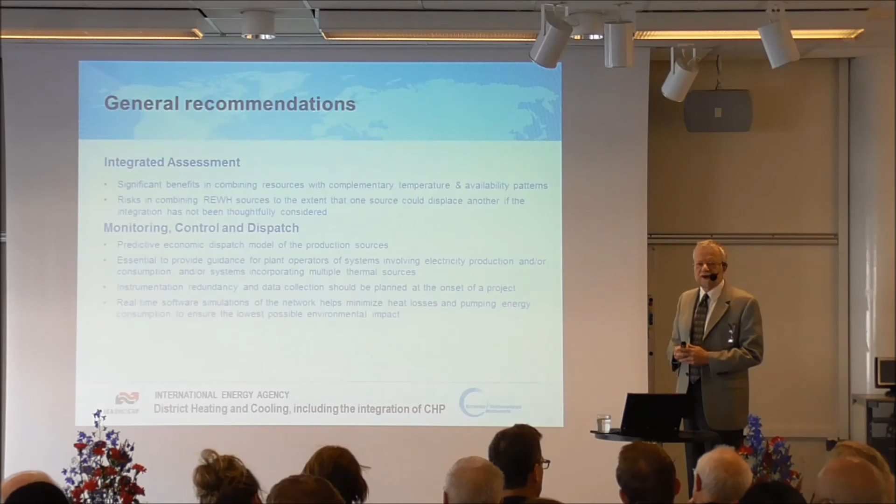And there's clearly - we have plenty of experience here with models for real-time software simulations of district systems.

Just on a kind of business level, when you're procuring a resource from outside - this is probably in the category of the obvious - but transparency is really important. I think it's very important to be very clear and open about what the costs of the resource are and what the consequences are of a loss of resource. And also, because temperature becomes more and more important as we integrate low carbon sources, it's very important that there be contractual provisions relating to the temperature of the resource.

In customer contracts, delta T is a critical element to the success of systems, particularly as they bump up against their long-term capacity. Different people have different opinions about this, but my opinion is that it's very important for customer contracts to have terms that actually push the customer to provide a good return temperature.

And obviously, if you're serving new buildings, it makes all the sense in the world to really work hard to work with them on the design of their systems. This has been important anyway. It becomes even more important as we drive those temperatures down further.

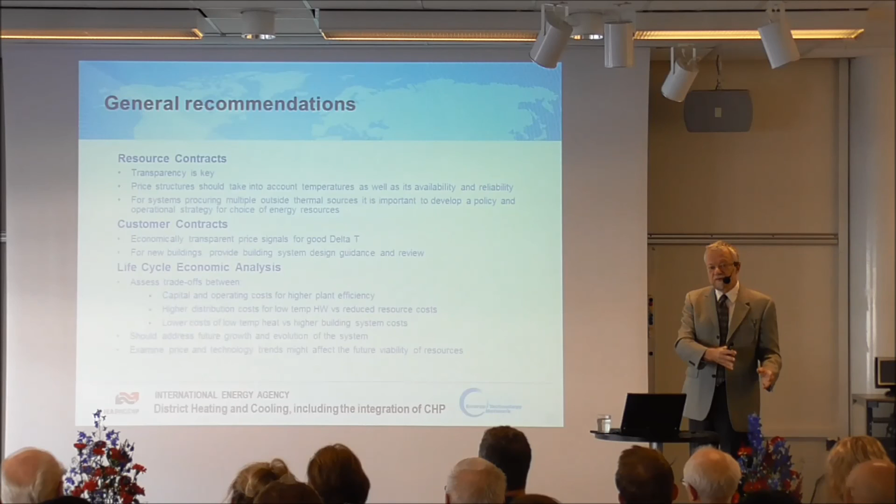Life cycle cost analysis, again, I think you're all familiar with some of the trade-offs that might be made. These become somewhat more critical when we're looking at low temperature resources, because we can drive temperatures down. It may require some additional cost in the buildings, but it's going to save some costs on the resource end. All three key elements—the resources or plant, the distribution, and the building system costs—need to be looked at in an integrated way.

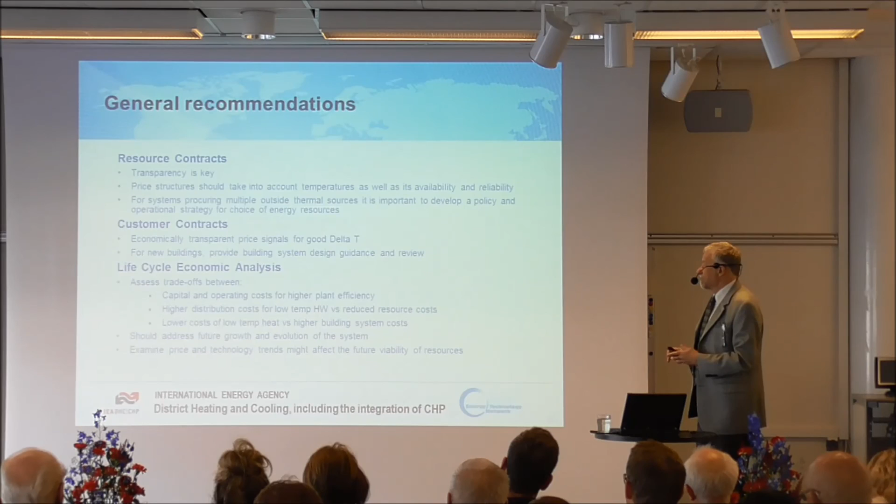And then the other thing I think is important is looking at the long-term evolution of the scheme, and preferably you're taking a particular step with a renewable resource, but that's part of a longer-term plan, and you're accommodating or planning for the addition of other resources down the line.

So we're running tight on time, right? Okay. All right. That's fine. We'll run through this pretty quickly.

But we have in the report, we took a look at some of the issues related to particular resources. Some of them are peculiar to their own resource. I am probably going to just skip through these.

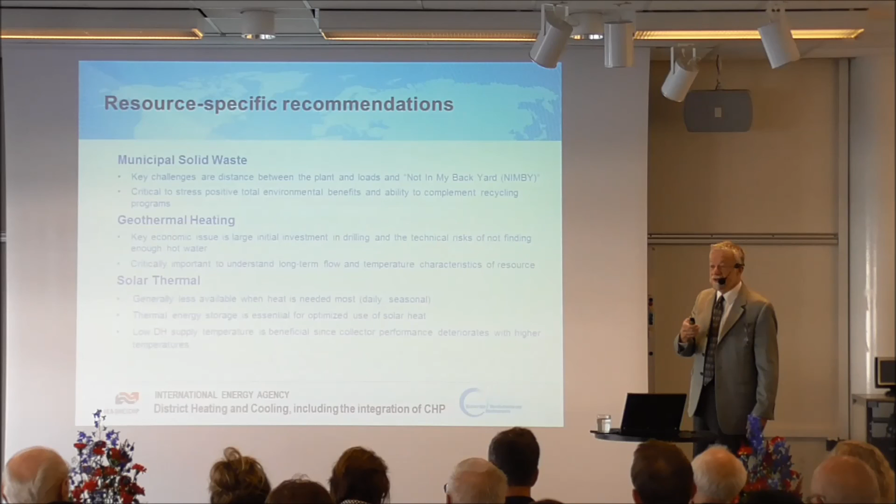We talked about NIMBY last night, and Anna introduced me to a new term, which is YIMBY—yes, in my backyard. So I like that.

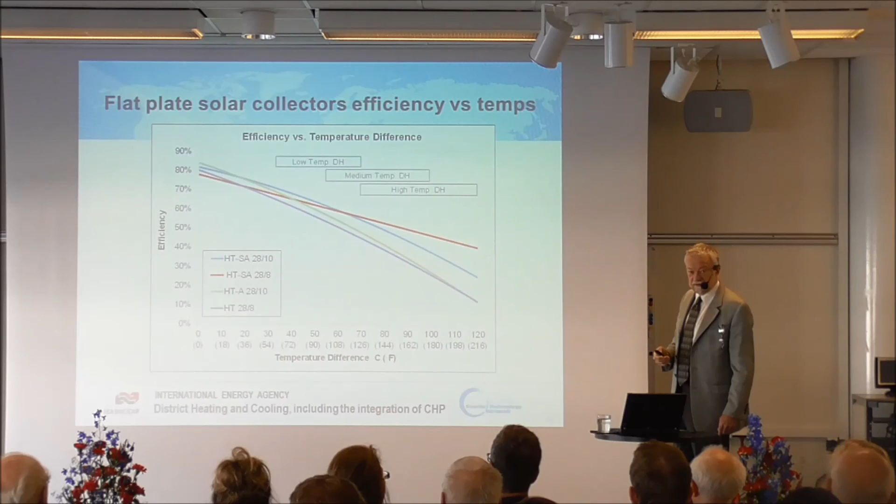I'm going to skip through this. On solar, we took a look at this—it's very important to look hard at your temperatures and make decisions about what temperature conditions you're going to be operating at, because different types of these are flat plate collectors with different efficiencies, vertical axis versus temperatures, the temperature difference on the horizontal axis. We've outlined the temperature ranges for the various schemes. It's important that you make a good match with what your temperature scheme is, and also choice of technology.

For example, evacuated tube versus flat plate. The blue A is evacuated tube, and B and C are flat plate. You can see if you really do need to be at higher temperatures, you're better off spending the extra money on the evacuated tube, but that's another one of those cost-benefit issues.

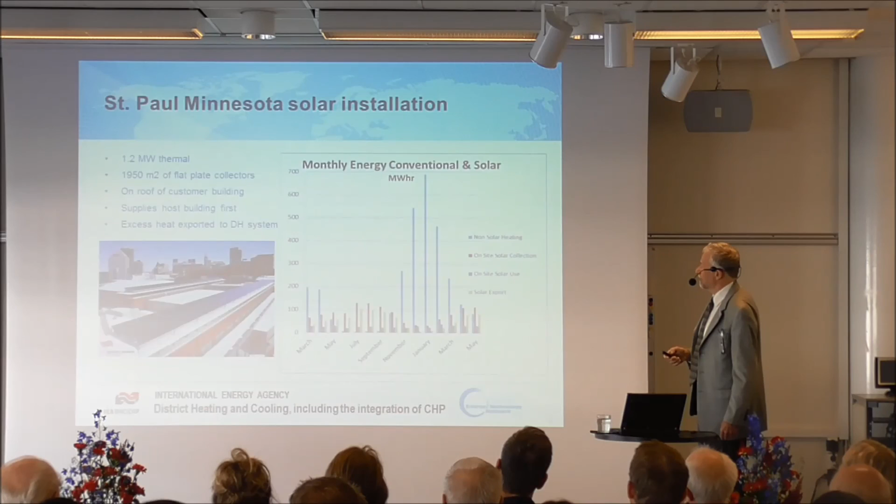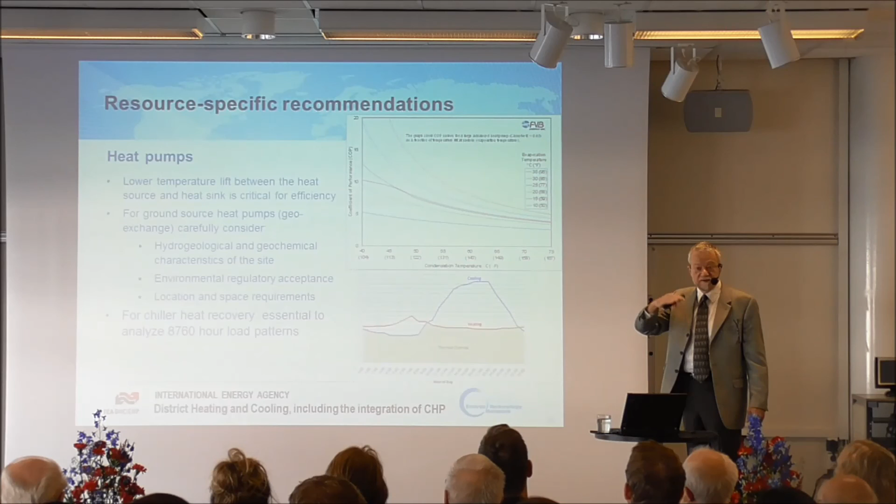Heat pumps, you need to consider—again, temperatures are critical. The efficiency depends on the lift, so you need to truly understand what your temperature regime is.

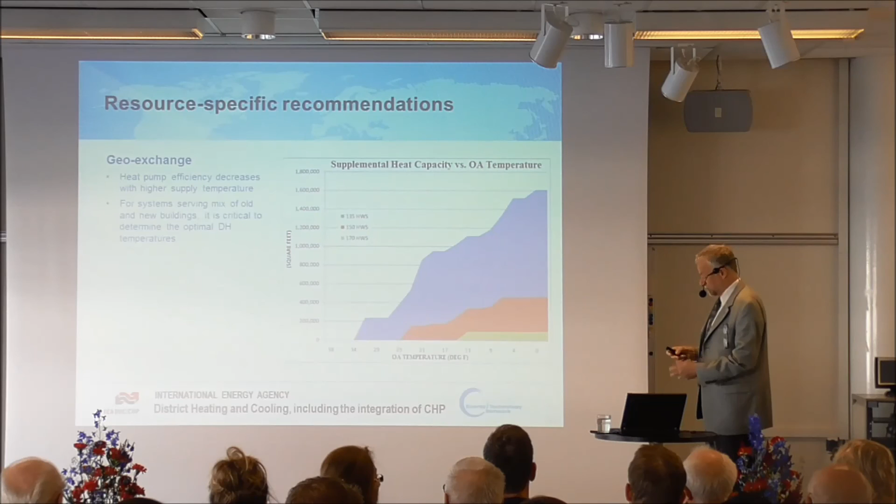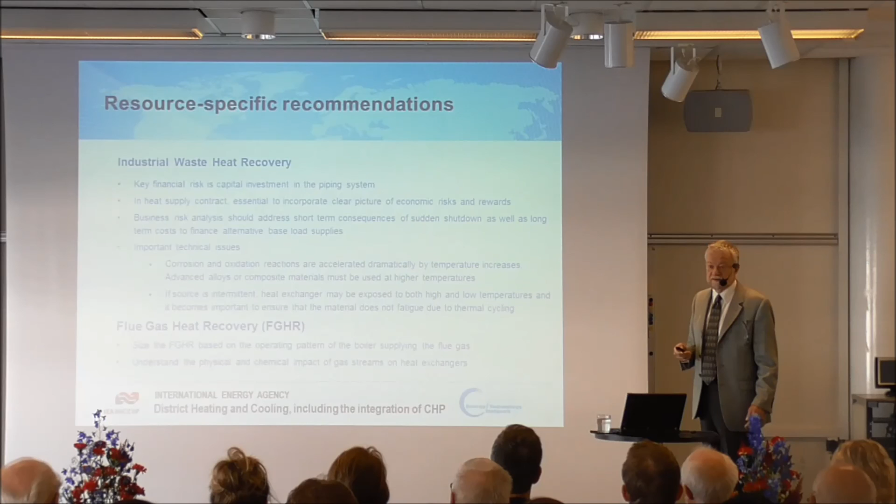Better skip through this. There are some technical issues associated with recovering heat from gases—they can chew up pipe. You know better than anybody. So that's it. Thank you.

Thanks very much, Mark. A huge amount of work across a wide range of supply technologies. I guess there must be a question somewhere. Apparently not. All right. No?